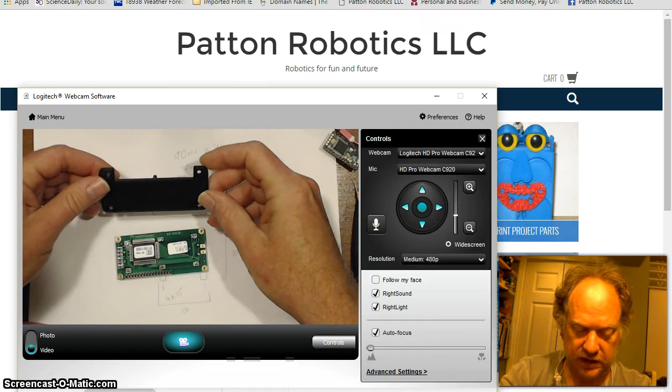But at any rate, you can see that this piece turned out, I think, pretty nice. Okay, I'm going to probably put a couple of standoffs on here and some through screws, and that'll fit on there just like that. And we'll be able to rotate it on our stand when it's done. So now we need to do this piece here.

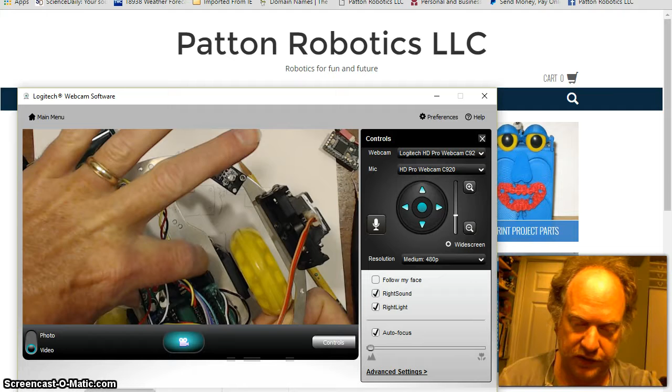I've measured it out using my caliper over here, that it should be around about 50 millimeters high, around about 50 millimeters wide. The only thing that really matters is where I'm going to put the holes in the feet, because I do want it to fit on my robot. Okay, and the distance between these holes, or the holes on the motherboard, is about 40.8 millimeters. So we want to have this distance here and here to have holes with 40.8.

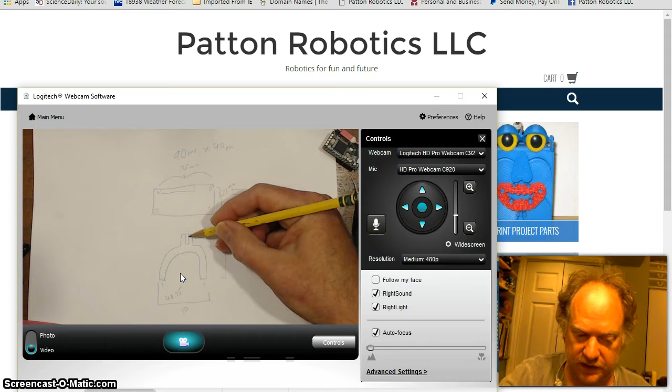This is 3 millimeters wide. Okay, so if I make the slot sort of short and 3 millimeters wide, well, remember the plastic itself is not infinitely thin, so it's actually going to bleed into it a little bit. There's the diameter on it. So I should probably make that like 3.2, 3.4 millimeters wide.

Or I'm going to make it 3 millimeters wide and a little tall so that it can spread out just a little bit and it'll slide in and it'll give us a nice frictional fit. But I got to be careful. Sometimes the ABS can split. So let's get going on it.

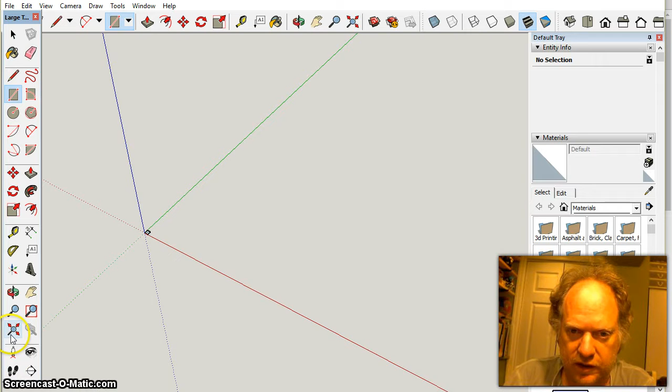So like I said, I'm going to make my piece basically 50 by 50, and I almost always start with a box. Okay, and 50 comma 50. Okay, there we go. Zoom into extents. Let's get it rotated in position like this, and I'll watch my time carefully. We're at 2 minutes already, and like I said, I like to start off by reversing the face. I want to see white. Should always see a light color.

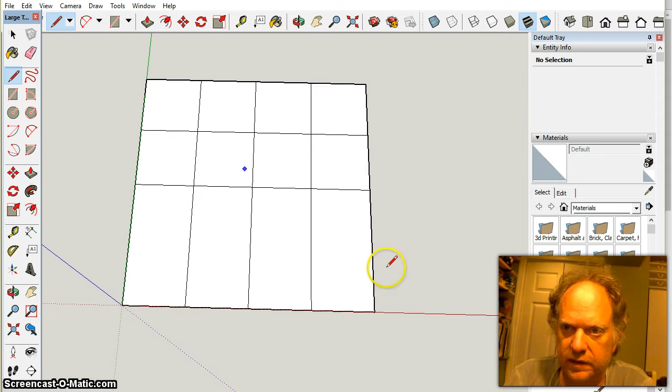And once again, just like I did before, I'm going to draw myself some reference lines from midpoint to midpoint. I put a bunch of them in here actually, because we're going to have some serious grid work to do. Midpoint. You know what? I'll pause it and draw. Alright, so I've drawn lots and lots of reference lines here. I'm sure there's a better way to do it. It's just the way I do it. I kind of like it this way.

So the first thing we need to do is put some reference points down for our holes, which are 40.8. What I'm going to do is I'm going to go to here. 40.8 divided by 2 is 20.4. So I'm going to put a box down here, and I probably want the legs to be about 3 millimeters thick. So I'm going to say 20.8 comma 3. Nice, okay. And we'll do the same thing here.

We'll make it 20.4. Boy, I'm screwing this up. Sometimes I worry about myself. Well, let me correct that. 20.4 comma 3. All right, and let's get rid of this. This is a serious waste of time. 20.4 comma 3. Okay, so that means that we're ultimately going to put our through holes here.

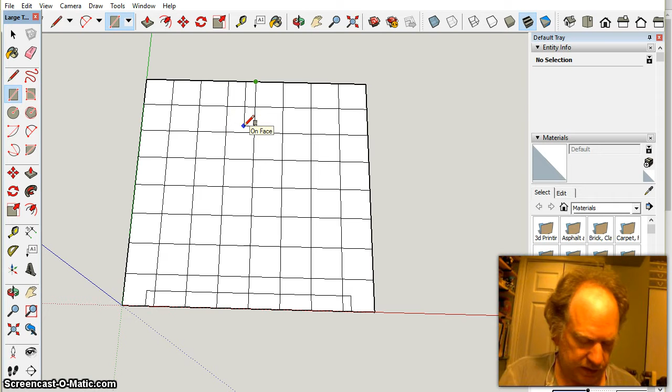Okay, so now it's time to think about the slit at the top. I want it to be relatively tall and deep. And this is a beautiful thing about 3D printing, of course, is I can always just do it again. So let's make it 10, and I'm going to make this box then a little bit wider. So 3, half of that is 1.5. Let's make it 1.6 by 10. 10, comma, 1.6. That gives us a little extra width.

And then we're going to come up here, and we're going to make this 10, comma, 1.6. All right, so now that's going to be our slot. I'm going to draw a couple more reference lines down here, midpoint to midpoint. I'm going to make this guy stand up a little bit.

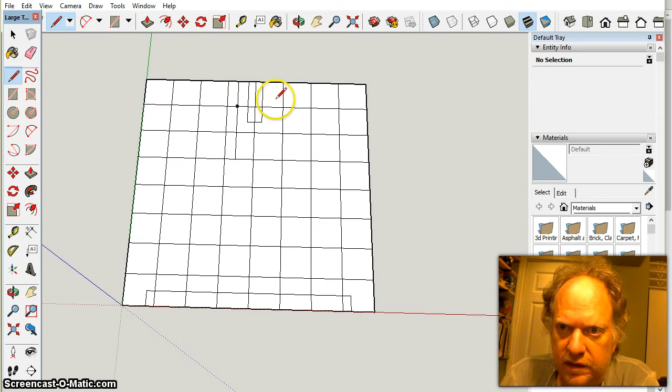Now, I want to make some kind of arc. I need some kind of foot. I don't want this whole base. I want this cut out in the middle. So if that's my centerpiece, what I'm actually going to do is go from midpoint here to midpoint here, midpoint here to midpoint there, and let's see, I'm actually going to go from here straight across.

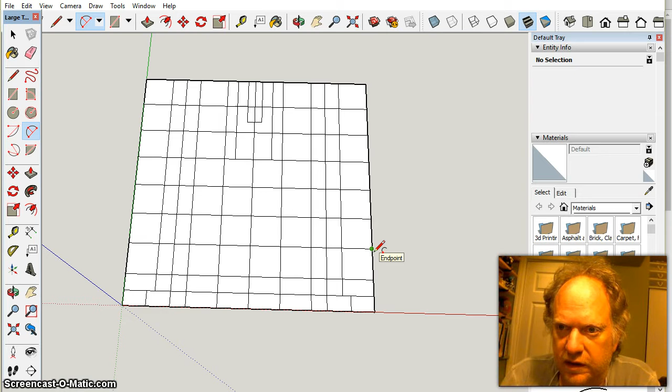I know this looks mystical, but when I start deleting stuff, it'll all make sense. In fact, I want to just delete that line there so you'll be able to sort of see what's starting to happen. Okay, this is going to be the foot that I pull out. And now what I want to do is make some kind of a curve. I'm thinking maybe from here to here. Let's see how that works out. Oh, I like that. From here to here.

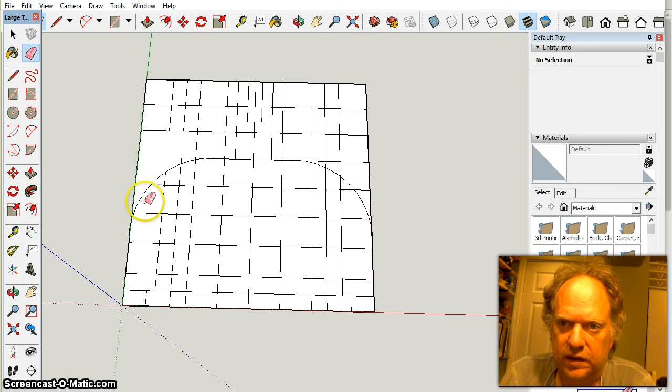Tell you what, let's start deleting a few things, so you start seeing what I'm drawing maybe a little clearer. I'm going to pause it and delete more. Okay, so now I've deleted all this extraneous stuff up here, so I think you're starting to see the shape come into play. And now what we need to do is put an arc underneath it to be able to support it.

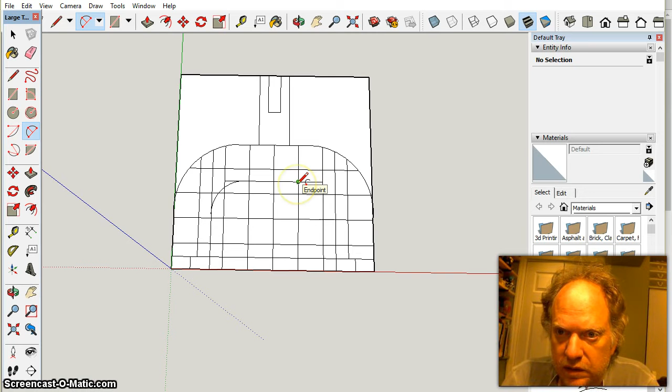And my gut feeling tells me, and I've done this a few times, that I'm actually probably going to want to put another midline, okay, and now I'm going to go from here to there, and from here to there. And actually, let me do that again. I'm going to make sure I actually got it symmetrical. Tangent to edge, that's what I want. And I want to go from here, there we go. That's what I was looking for.

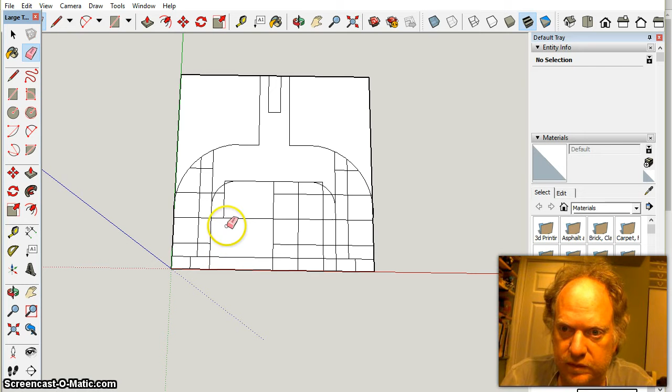And now let me start deleting some junk. Okay, I'm going to get rid of all this junk in the middle. All this junk. Tell you what, I'll pause it again so you don't have to watch me just delete stuff, but you got the idea so far. Alright, finishing off the deletions. And now you can see our outline, I think. And remember, these two lines here are the hole lines that are going to line up with the holes that I need to put into the bottom.

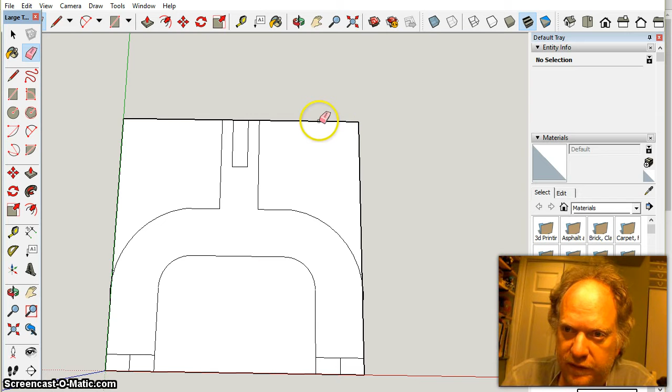So I've got my nice arc. I could have made this a deeper arc. You guys can design your own piece. This is just what works for me for the moment. And the next thing to do is, well, we can actually get rid of all these bits, right? We can start actually cutting it out. Get rid of all that stuff. Get rid of that. Okay, so we definitely have to clean up this little bit right here. I'm not shooting for perfection here. I just want something that's cosmetically okay and functional.

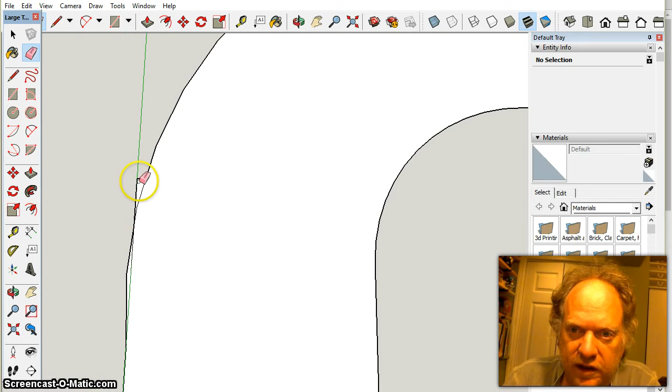All right, super. So the next thing is we need to then pull it up. Now, I want some depth to this thing. I don't want it to be super paper thin. Remember, I'm going to stick a screw ultimately all the way through this. Right through there. So I need something that's kind of thick. And if you use your caliper, let me switch over to the camera.

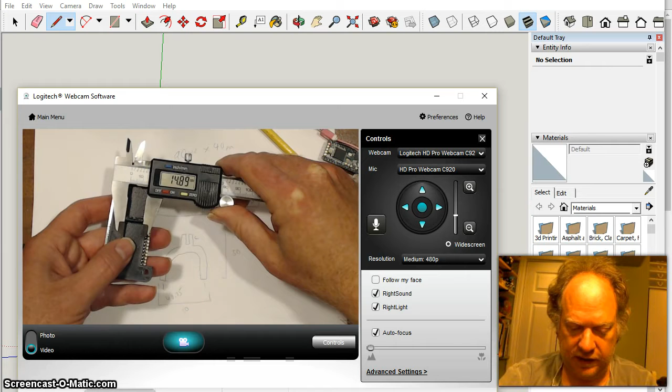So we made this piece 15, okay? 15 millimeters. So if it was a perfect matchup straight up, it would be 15 millimeters thick. So we'd have to raise this up 15. I don't know if it needs to be quite that thick. It takes a long time to print, and it's probably not really going to gain us anything. I'm going to make it about 1 centimeter, 10 millimeters. So let me come back to this.

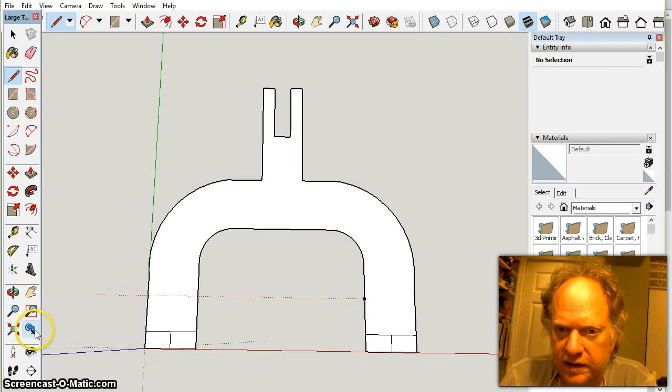And let's spin this a little bit so we can kind of see what we've got working with. And I'm going to raise all this up 10 millimeters. And then I've got these feet. I'm going to raise them up. I want to go up 10 to there, plus I want them to stick out so I can put a hole through it. Let's make it stick out another, oh, let's stick it out another 10, so we'll make it 20.

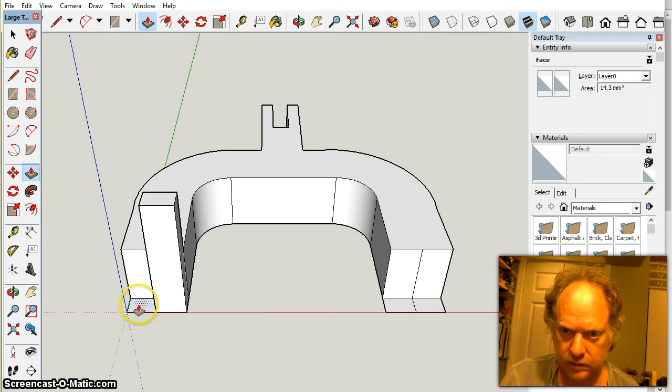Actually, I could just double click. All right, excellent. So now you can see we've got our piece starting to really shape up. And we're going to go put a hole through here. So let me do a couple little cleanups because I'm going to run out of time, and I'll show you the holes. Okay, I'm going to put one hole through this foot, and then I'll just do the other one while it's paused. But I'm going to do the same thing I usually do. I just like having my reference points. I don't have a drawing that I'm following, no CAD diagram. I'm doing this all by just sight.

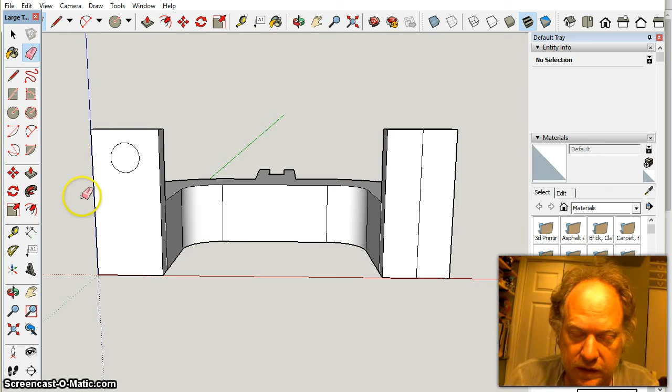But I'm going to go ahead and put this here, and I'm going to put a hole that is 2 millimeters in radius right there. And then I'm going to get rid of all this junk. Like that. Okay. And I should spin it around. Get rid of the junk on the other side. For the moment, at least. Spin it back around. And push it through. And it was 3 millimeters. There you go, you got a foot.

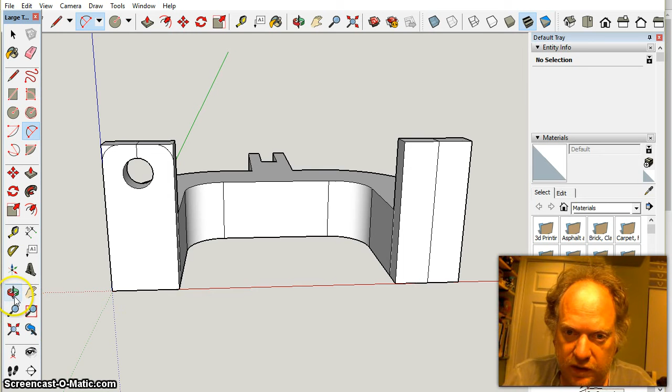I'm going to actually chamfer these edges too. So what I'm going to do is like I did in my last video. I'm going to put a line in here as usual. I'm going to go from there to there because I want to put a chamfer that goes from the midpoint to the tangent, midpoint to the tangent. And then recall, I have to do that to the other side. We're going to run out of time again. Dang it.

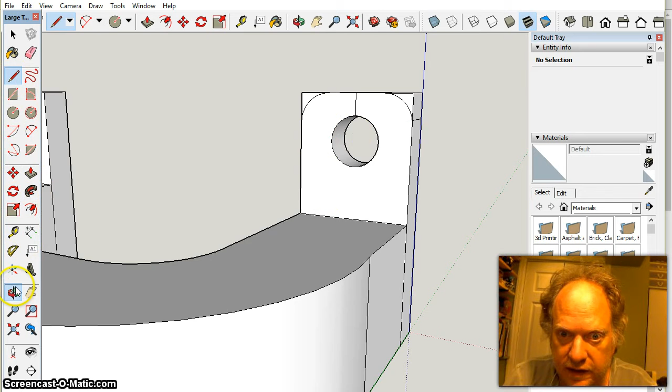Midpoint. Oh, get down there. I'm going to go all the way. No, right there. And then we go from midpoint to tangent, midpoint to tangent. Oops. Tangent. Zoom in a little bit here. Let's draw a line from the end point to the end point, and I need to do that up here, and I'm going to go from end point to end point, and that actually looks funny, but let's see what happens. Hopefully it works. And I'm going to push this through.

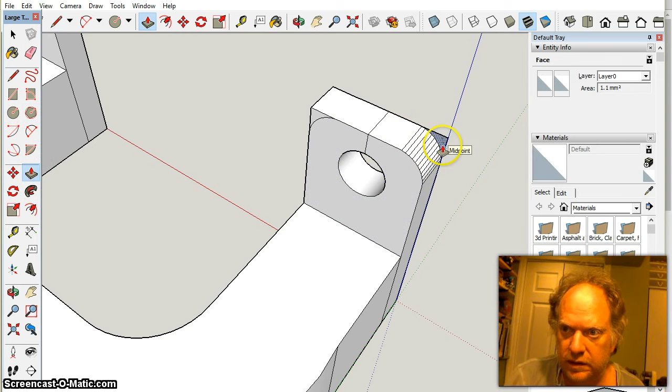Oh, I knew I didn't do that right. Give me a moment. Okay, my mouse moved at the very last second. End point to end point. Now I'm certain. Push it through. Okay, and now I'm going to pause it and do the other side.

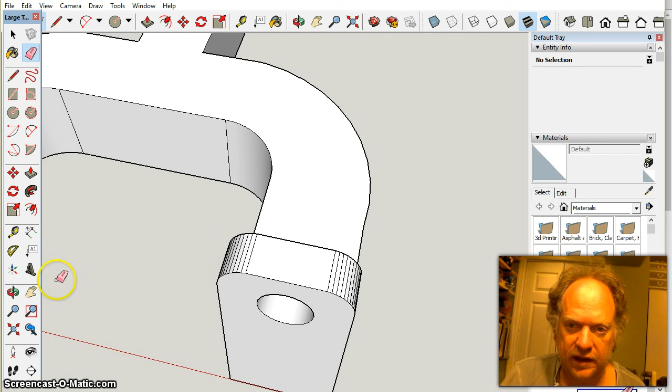Okay, I've gotten rid of almost all the points. I left this one here because I want you to see what happens. Sometimes this bizarreness happens and it just disappears. It's usually easy to correct. Just make sure you get on the right places, you know, on the surface of the same lines. Draw a new one, and lo and behold, you're back to where you want to be. So now what I'm going to do is, I've only got 30 seconds. I'm going to put a hole through this side, so I'm going to get it all lined up, and I'll see you in a second.

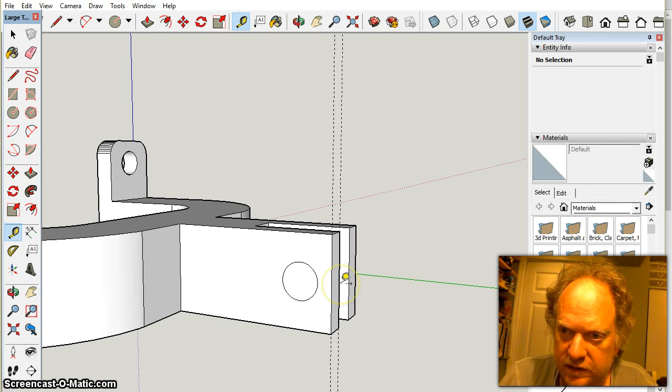Okay, so I've got it all lined up. I've only got 20 seconds left. I've drawn my reference points like I always do. I'm going to put it here, and I want a circle 2 millimeters deep. Okay, and then I'm going to delete all the stuff and push it through. I'll see you in a second. Okay, I need to know how deep this is. It's 2.3. Take this, give it a push, 2.